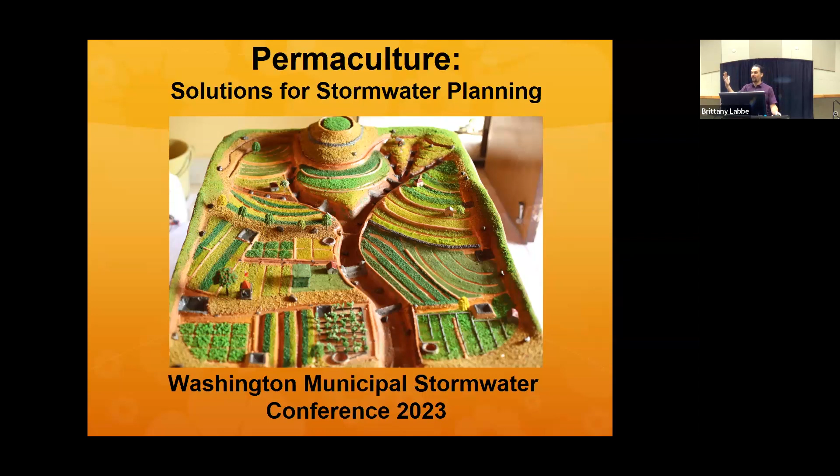I ran over to my wife and my family. I was like, you won't believe it. I was asked to keynote the Washington Municipal Stormwater Conference. This is crazy, right? My wife was like, ooh, wow, honey, that sounds really fascinating. It's gonna be crazy, right? Like what happens in Wenatchee stays in Wenatchee. I was like, no, you don't understand, right? This is not boring. This is super exciting, right? And like my wife and my son, they kind of laughed at me. They're like, yeah, okay, exciting, right?

And I had to think about it, and I was like, well, I guess if you're doing stormwater management in the conventional sense, channeling water from source to sink through concrete lined channels, I can't blame them, right? So how many people here, give a hand up if your husband, wife, family, partner would actually agree with my family and think that municipal stormwater management is kind of boring? Okay, I see a lot of hands there, right? So can we blame them when this is the public's image of stormwater management?

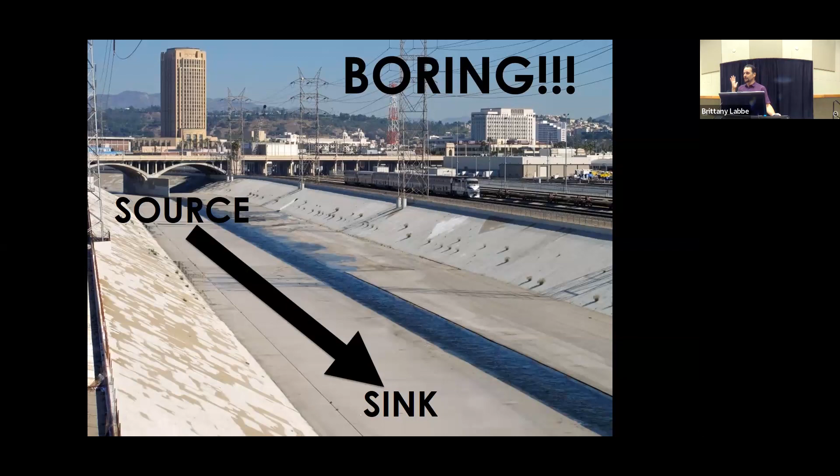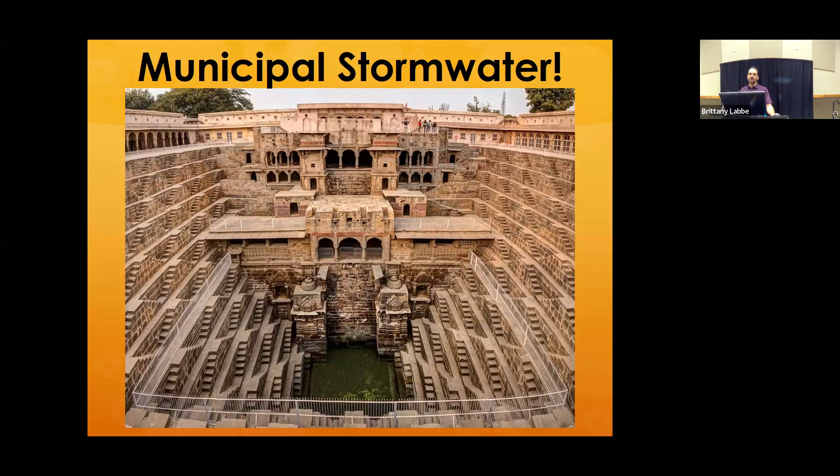But what I'm here to say is that stormwater management, municipal stormwater, is a fascinating topic. When we look throughout history, we see many amazing examples. I've spent a lot of time in India. I've visited a number of step wells that are collecting the runoff from the surrounding area into these geometrically designed water storage reservoirs where the water level fluctuates throughout the year and people are going down, dipping water in here and bringing it back home historically for their domestic water supply, right?

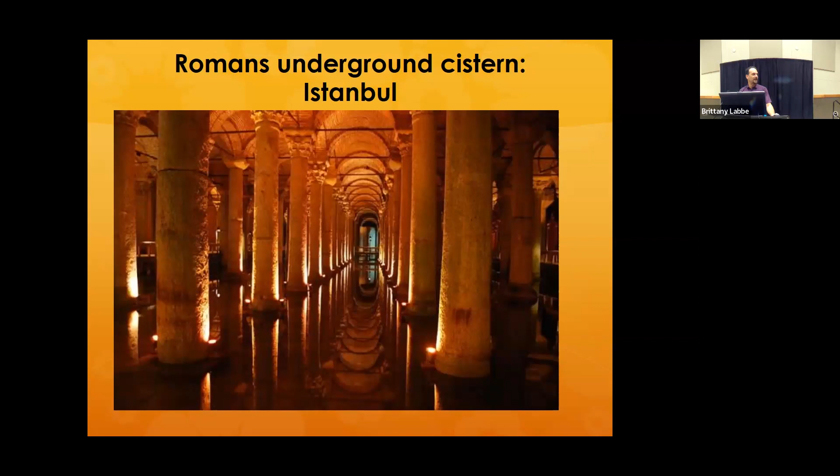Or when we look at some of the Roman underground cisterns, beautiful columns and archways that are collecting the runoff from vast areas of cities and putting them down for ancient people's water supplies. We see these same types of systems in Morocco, ornately done, where stormwater management is an art and a craft, right? And really is the foundation for the infrastructure of the whole society.

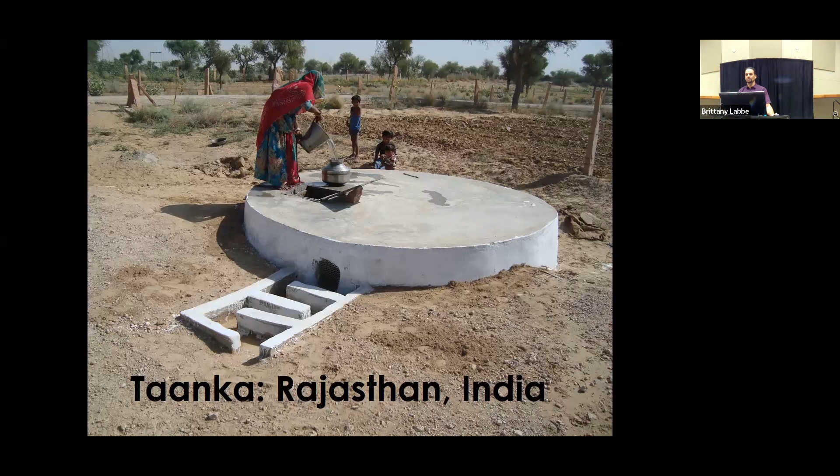So if you have a son, you know, marriage here is arranged between parents. If you have a son, and traditionally when you marry your son off, someone sends their daughter to you, right? People do not want to send their daughter to your family because they don't want them to have to walk for hours a day collecting water. So here, stormwater management has direct social repercussions, right? So, you know, it's a big field.

And in permaculture, we're looking at not just stormwater management structures as these isolated pieces of infrastructure. We're looking at how they integrate into many other elements. Okay, so permaculture, for those of you who haven't heard of it, is a design system for creating human settlements, right? So we're talking about water, roadways, structures, trees, fencing, right? All of the things that surround what people need for their basic livelihood. So it's a design system for creating those things.

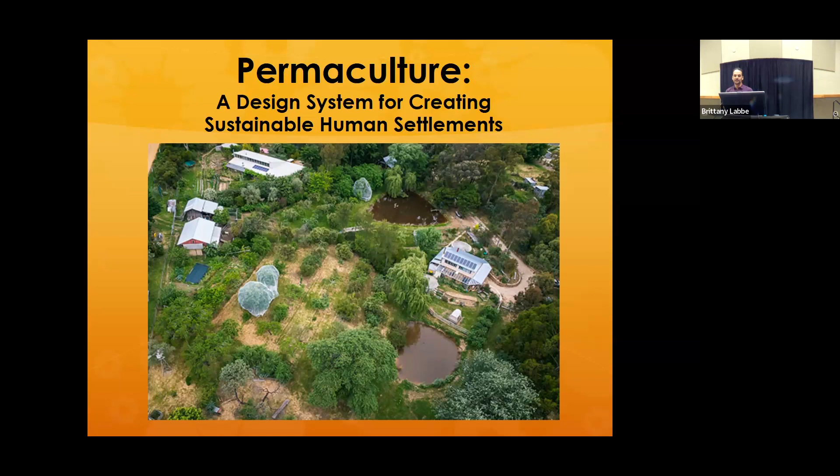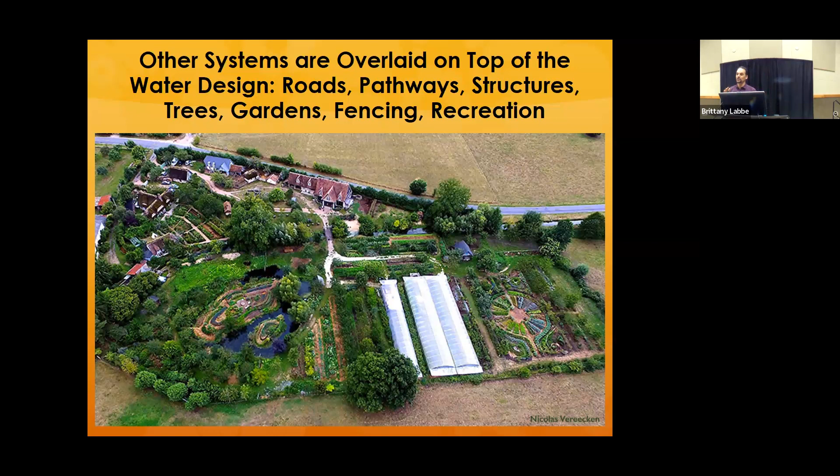And water management is the bones of that system. So when we're designing a system, the first thing we design for is how are we going to manage and move the water through that landscape? And then how are roadways, pathways, structures, trees, gardens, fencing, recreation, public areas going to be overlaid from our base of water management design, right? And so in permaculture, stormwater management is definitely the foundation of any system that we're designing. And it's all about integration.

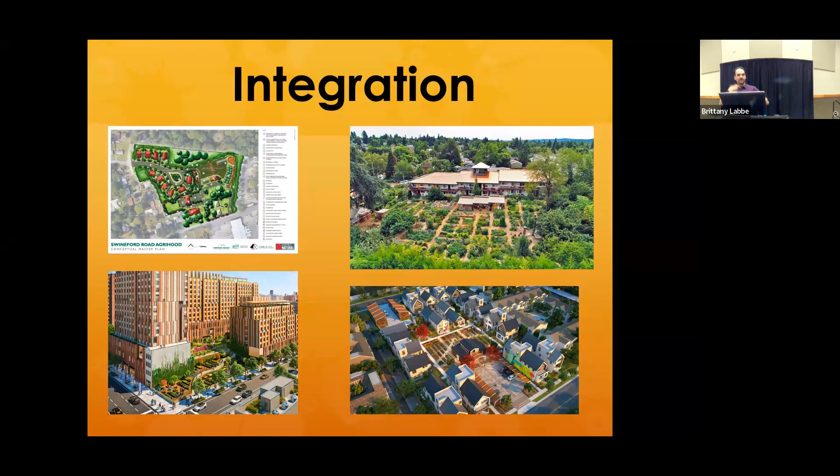Okay, and this is the main takeaway that I'm going to want to impart to you for this talk: how do we integrate stormwater design, municipal stormwater management, and actually have it create the basis for many other benefits that we can get? So there's many different scales, from the urban to rural, of how we can design around stormwater first. Okay. So let's talk specifically about Washington. Now, Washington has a number of different climate zones.

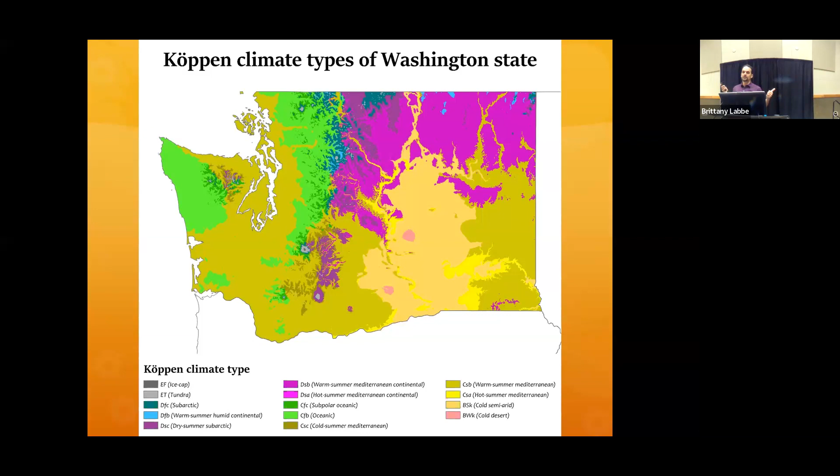So how many people in this room are from the dry side of Washington? So we'll start with the dry side here. And let's talk about how permaculture would view urban design in the dry side of Washington. Now, I'm going to share an example. This is actually one of my teachers, and this is a project that I've been visiting since 1996 when I first took a course here in Tucson.

Now, Tucson, as many of you know, has about 10 to 12 inches of rainfall per year, similar to a lot of areas of dry Washington. Now, Brad Lancaster has been working since the early 90s, basically as a citizens initiative, to infiltrate stormwater into his neighborhood in Tucson, Arizona. And the basic premise, he actually started out illegally, cutting the curb without permission from the city, where the storm is running off in the gutter next to the road, and creating basins and planting trees.

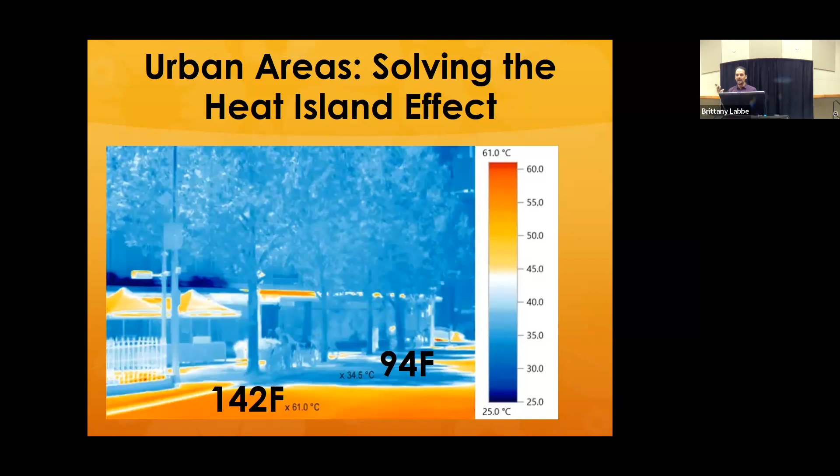And saw that the pavement underneath trees was 94 degrees Fahrenheit; it's extremely hot out here. And then in the open blacktop, in the beating sun, it could be up to 142 degrees Fahrenheit. So we're talking about cooking your food on the open road. That's how hot. Look at the temperature differentiation here between shade and sun. So especially in a hot climate like Tucson or like Wenatchee, just that marriage of stormwater and trees to mitigate the heat island effect, that's all the integration you need, basically.

Now, when we jump out to the rural areas, we can have a similar relationship between runoff and tree growth. Again, I'm showing you some extreme examples. Here is the Negev Desert in Israel. This is an area that receives about an inch of rainfall a year, so maybe one or two storms a year. It's a very barren area, which means you have a huge amount of runoff.

So all they did was place this basin here in a point that was going to collect a lot of runoff from the surrounding environment and planted hardy native trees that could survive off of that extra runoff. And they grew these trees here, and there's real effects by just simply digging a hole in the right place and putting in some hardy plant species.

So, groundwater recharge. If you have a series of structures like this throughout a watershed, where you're infiltrating water and it percolates in, it no longer is running off. So you have groundwater recharge, you can control erosion, and then through the plants, you create habitat and biodiversity. So we start to get a lot of these integrated effects through just a simple structure.

Now, when we think of groundwater recharge, we think of the way that water moves through the watershed. These watershed basins are in the pattern of trees, these small branches combining, leading to other branches, leading to bigger branches. And when properly placed, we could see incredible effects when we're slowing the movement of the water through the watershed, through that watershed tree.

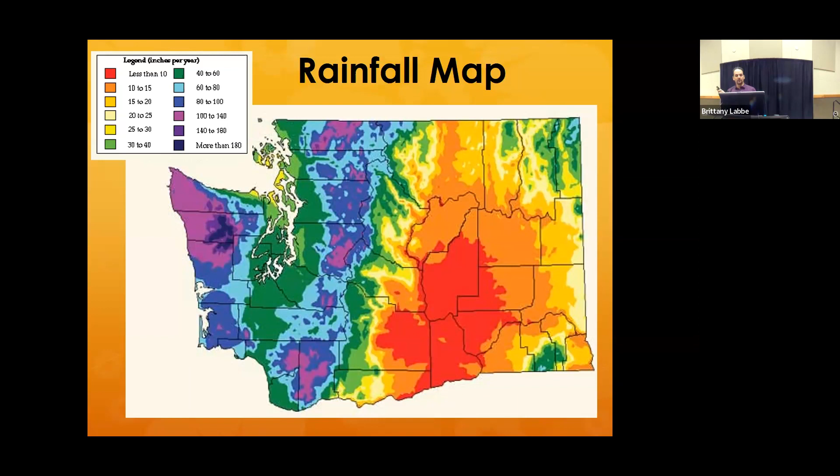Because we're creating this structure, we're just creating the same thing I showed you with Brad Lancaster creating in Tucson. It's just a little place in the curb, a cut where the water goes into a basin. But I know for a lot of people in your field, the management of these systems are creating a lot of work for our landscape management teams. How practical are these, right?

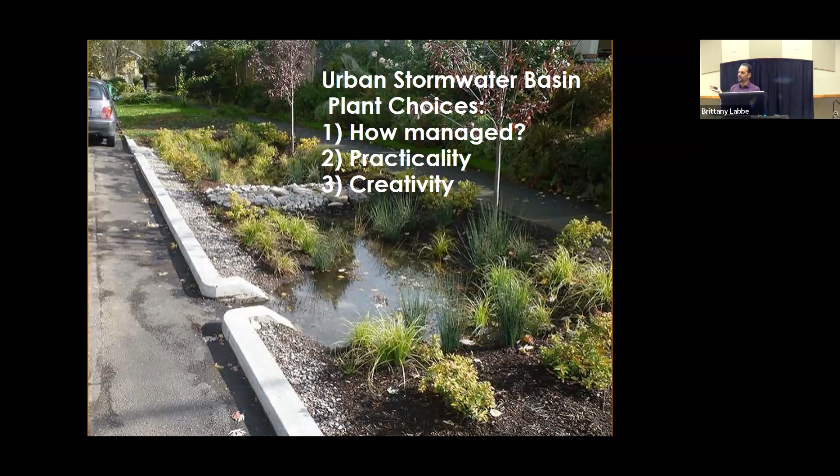So the creativity of what we do with a system like this really is going to depend, especially in your case, on what is the cost of maintaining these systems, okay? But when I see a system like this that is planted in exotic ornamentals, the thought that always comes to my mind is, why are we not just using hardy native plants that require very little maintenance and also provide a lot of ecosystem services, right? Ecosystem services are the many and varied benefits to humans provided by natural environments and healthy ecosystems.

So I want to flip the script a little bit and say, ask not what you can do for your ecosystem, but what can your ecosystem actually do for you when you get it started, when you jumpstart ecosystem services and processes by creating native ecosystems in a bioswale like that.

Now, when I was walking around Wenatchee the last couple of days, I was like, I would bet that if all of the stormwater in the streets around here was going into vegetated bioswales throughout the city, and all the water was feeding this diverse matrix of low maintenance native plants, right? I was just imagining the pollinators that would then have this permanent food source. You'd have all of these pollinators all throughout Wenatchee that had all of these different flowers flowering at different times. And so you're supporting this whole ecosystem of predator and prey relationships.

And I was like, well, I wonder if you could get enough ecosystem services in Wenatchee from native planted stormwater basins to actually provide pollinators for the surrounding orchards, right? I mean, why not? It's just an idea, but this is kind of the level when we're saying, what can your ecosystem do for you? That could actually lower the costs.

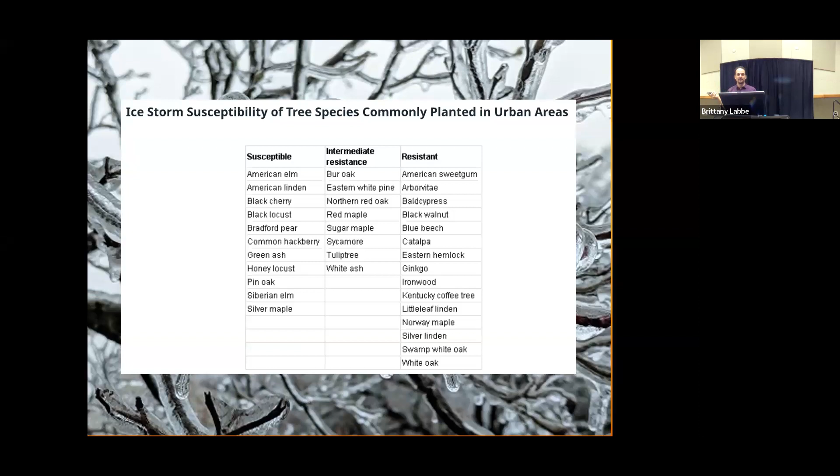So this is a list I just Googled. Washington ice storm resistant trees, and WSU, of course, had this wonderful list that showed susceptible, intermediate resistance, and resistant trees to ice storms. So, a lot of this is just about plant selection for the practicality, the management of these types of systems.

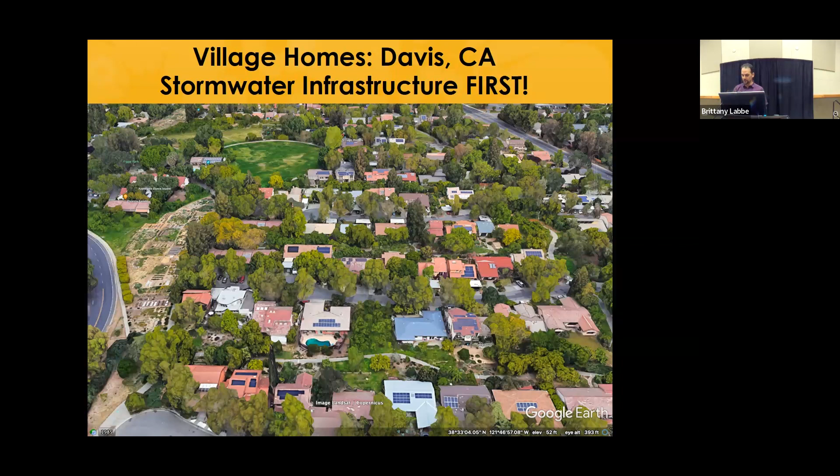Okay, so this is a map here, and I'm going to use the mouse to just show you a little thing here. So you can see here the cul-de-sacs, right? And so we have the cul-de-sacs, and then we have the homes that are clustered here around the cul-de-sacs. And then we have the next cul-de-sac up here and these homes that are clustered around the cul-de-sacs.

And then in between those homes here, we see this path. Okay, and in between each cul-de-sac, we have this path between the homes. Now that path is not just a pedestrian path. That is a big giant swale, a big giant water collection basin.

Now, before I go to the next slide, I want to also point out that all of these homes, all of these roads are elongated east to west. So by design, all of the homes are oriented for good passive solar energy, which reduces their energy costs, reduces their lighting needs, reduces their heating and cooling just by the home orientation.

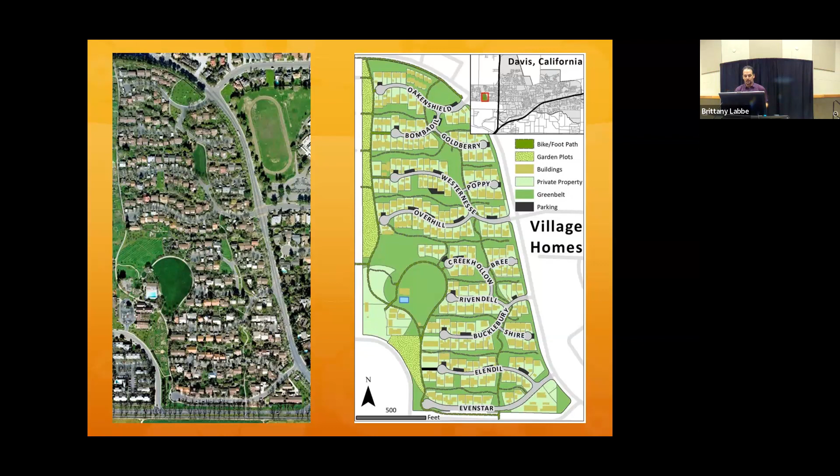Okay, so this is what it looks like between those homes. All of the water from all of the houses, from all of the roads, from all of the paths, all the hardscapes is collected in these basins, and then a nice pedestrian pathway is going through there. And these basins are planted. I mean, you know, the Central Valley in California, you can grow practically anything.

They're planted so densely in food plants that when I was there, I literally just closed my eyes and opened my mouth. And I walked through here and food just fell in my face, grapes and figs and pomegranates. It was incredible, right? And you can imagine how it's resistant to drought. Every time it rains, this high concentration of water from all the hardscape is going into these basins. It's infiltrating in, it's feeding this perennial vegetation that is establishing deep roots.

And so when the Central Valley of California goes into its regular drought period, there's a lot of moisture retained in the soil here. They built this subsurface water table under this community. It just doesn't dry out under there. On the flip side, when there's flood, the infiltration in these basins is so great because of all this extensive root network and the fact that there's this place for the water to flow into, and the houses are up on raised areas, they also had no problems when there's been periodic floods here. So a system like this is actually resistant to both drought and flood.

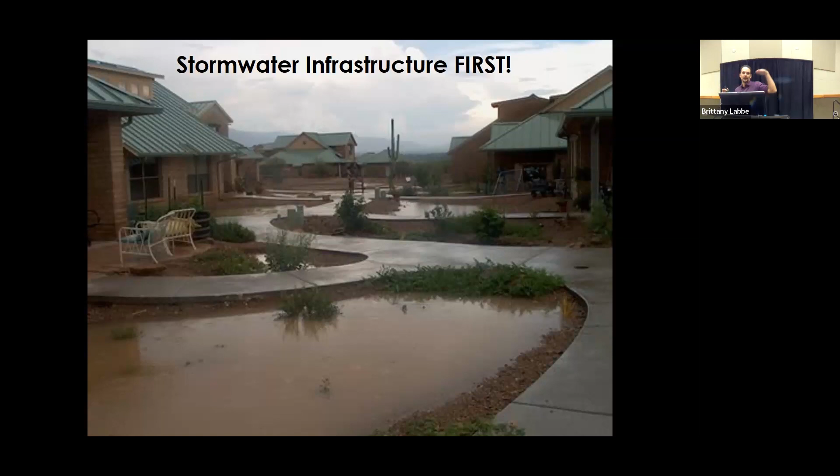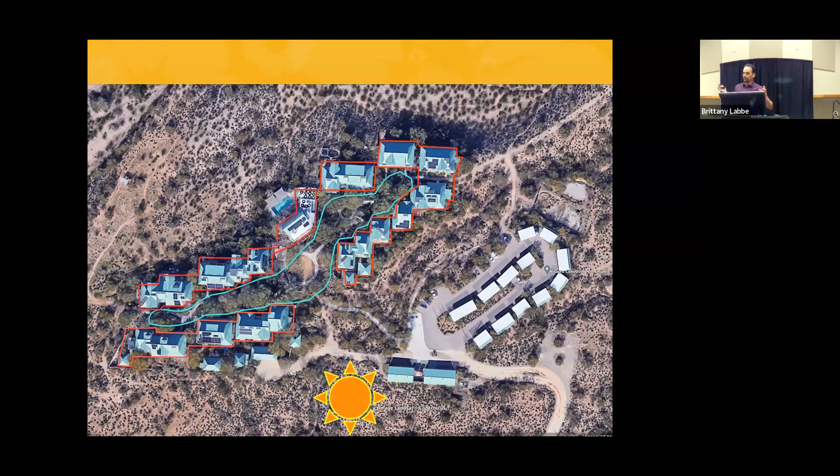When it rains, the basins fill up and they overflow one to the next, okay? So all of the water is concentrated in the center of the community. So they're basically at least doubling the amount of rainfall that comes into the center of this community here. Not only that, but all of the homes, again, are placed and designed to have good passive solar access, right? So all of the homes, they're basically an adobe with windows on the south side.

And when it's sunny out in the wintertime, the low sun heats the interior of the homes. And in the summertime, the sun is excluded from the windows and they save on energy, they save on lighting, and it's very comfortable, right? So here we see the integration of passive solar design, water catchment, and then we add in wastewater reuse, recycling. So then they take all the wastewater of the community, they run it through a constructed wetland system, and then any excess is then used for further irrigation.

Right? So this is integration. When I'm talking about permaculture is integration, this is taking three basic elements, putting them together and creating a system. This thing is incredibly pleasant for the people that live in this community. I've walked through here. It's really nice. It's all under this beautiful shade canopy. They've got fruit trees everywhere. Kids are running around. It's cool. There's swings. People are gardening. They've got cisterns. It's very nice, right?

And think about if you're wandering through the desert, where is the nicest place to be? Right? What are you looking for? What is like the holy grail of desert? Shade, water, right? A canyon, a sheltered canyon oasis. So through their development, they have actually put in the structure, the canyon walls are the homes, and all the water's channeled into the canyon there, and it's shady, and there's moisture in the air, and we call this biomimicry, right? Biomimicry is a practice that learns from and mimics the strategies found in nature to solve human design challenges.

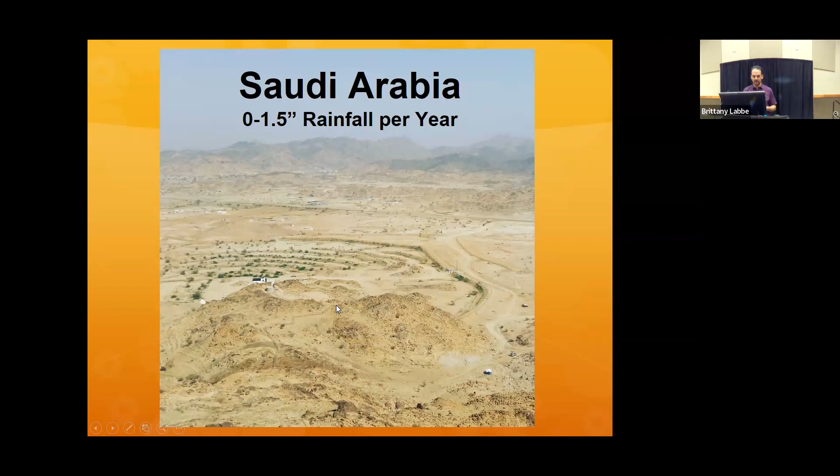These are all planted in on contour swales that are harvesting the water that's running off of this rocky hill here. So when these storms come through, there's so much runoff because this is just impermeable rock, most of this here. And in those swales, they planted trees. This was an experiment, right? See what would live. So they gathered trees, different species, dryland species from similar climates from all over the world, and planted them and irrigated them and got them established for about 3 years or so.

And they only irrigated the amount of water that they were actually collecting. So they kept within their water budget. And then after the trees got established, they turned the water off. It didn't rain for a year and a half, and most things died, but 4 different varieties didn't die, right?

And so they found out what 4 tree species could live off of only the rainfall in a water harvesting basin in a place that gets 0 to 1.5 inches a year. So really, it can be done anywhere, right? So if it can be done here, it can be done basically anywhere, right?

I'm going to just tell you about the most inspiring stormwater management story that I know of on the planet, and that's the Paani Foundation in Maharashtra, India, right? And I've visited their work and documented this extensively on my YouTube channel, and I was there just a couple of months ago, where basically there's a contest between villages to see which village could build the most amount of stormwater management structures in a 45-day period.

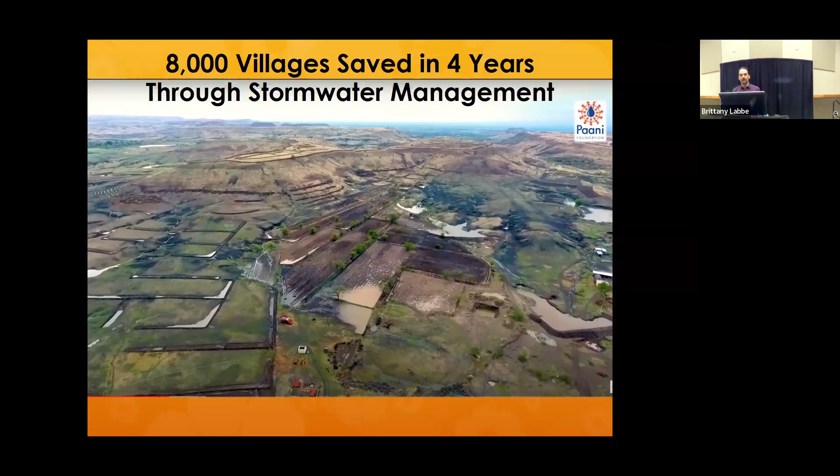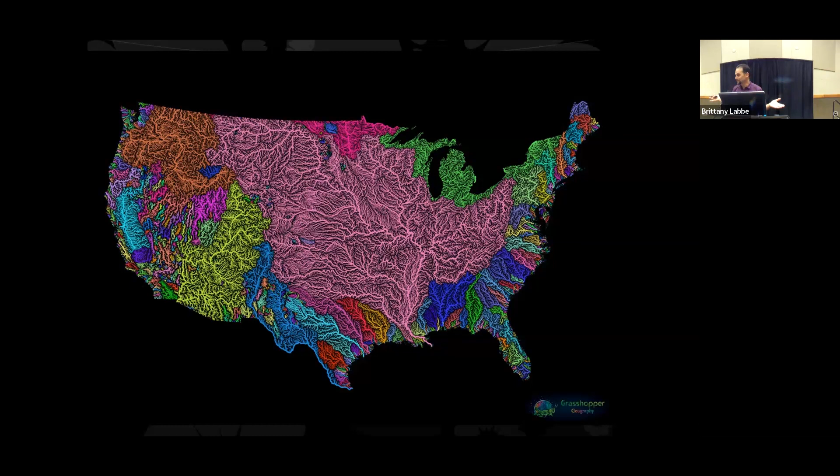But as you all know, working in municipal stormwater, the challenges of property ownership and property management are very difficult. So how do we do integrated watershed management in this context? I guess I would put that out to you, right? Because you're the ones that actually have to work through this complicated equation of how do we actually get the maximum wonderful benefits of integrated watershed scale management, where we restore water tables, we reconnect ecologies, we provide shade for our communities, we provide ecosystem services, we provide all these other yields when this is done well and done right.